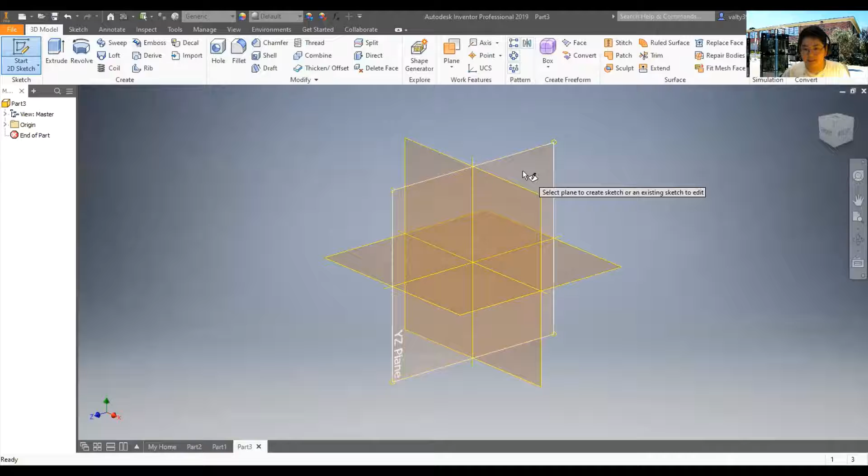Draw a simple rectangle with the construction line clicked on. Draw any rectangle. From here, we can calculate things a little bit more quickly by using the dimensional tool. Make it 0.5 and make it 4 inches tall.

With that done, let's move on to the Spline tool. Click onto Spline Control Vertex and click onto the top right of the box. Then click a little bit to the right and click all the way down. With that, your spline is done. However, the computer still thinks you're editing your spline. To finish your spline, press the check mark.

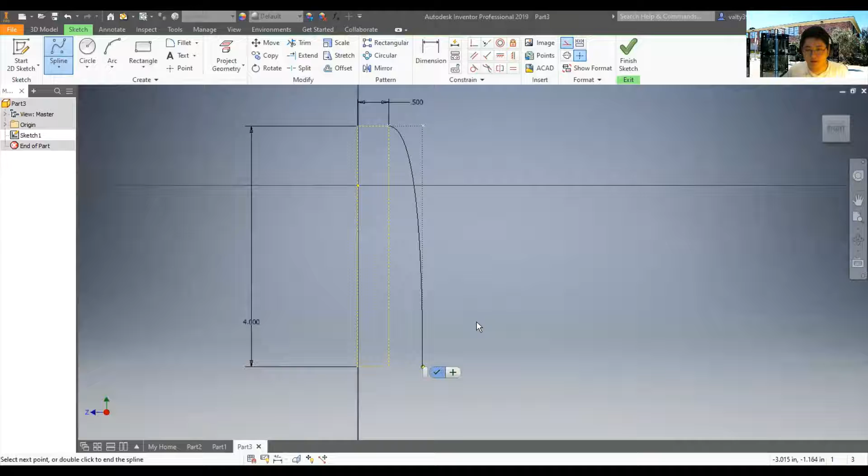There we go. Grab a normal line, and now let's turn off our construction line and just draw there to there. Right click and left click cancel to get out.

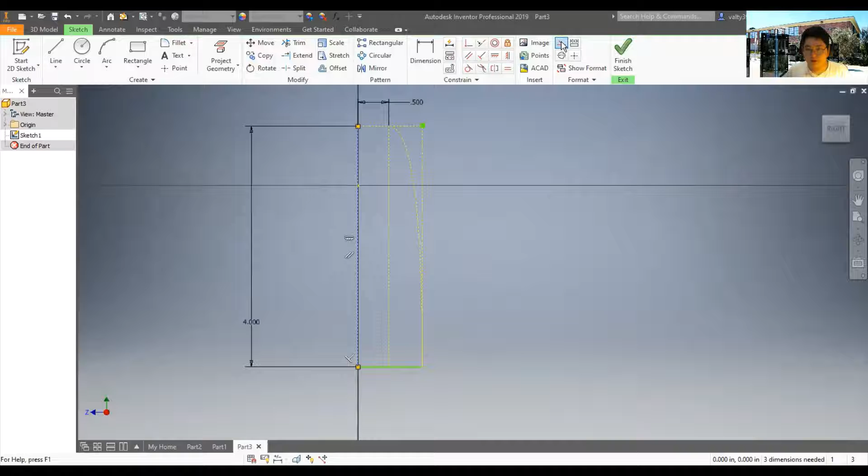Now, let's make all our parts into non-construction lines. Click onto this line and click on that. Click onto this line, click on the construction tool. Click on this line and click on the construction tool. And lastly, our spline, click on the construction tool, and we should be out of construction mode.

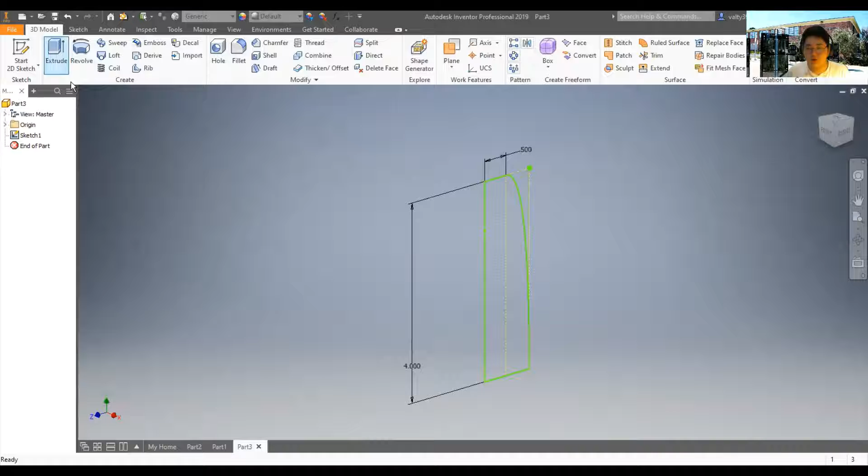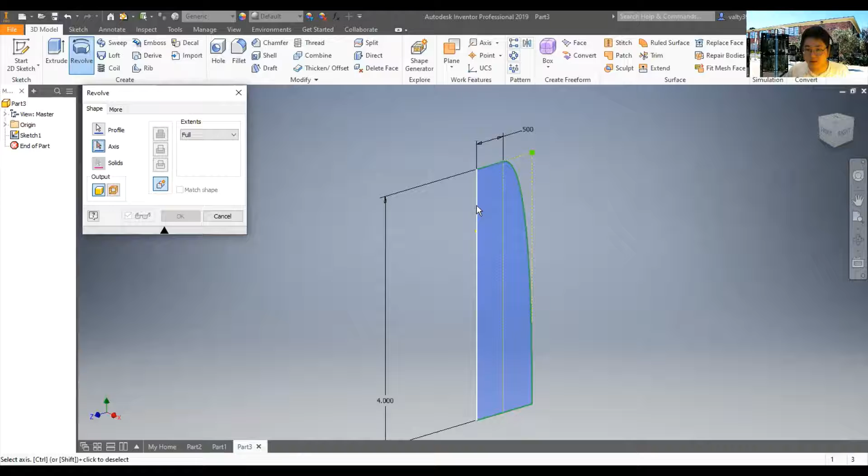With that said, let's now finish our sketch. Instead of using extrude to convert this 2D figure into a 3D figure, we will choose Revolve. There are two types of things you need to select. First, the profile - make sure to select all your surfaces with a profile. Then click on Axis, and make sure to choose this white line - it must be this line. Then click on Angle, and let's go with 180 degrees.

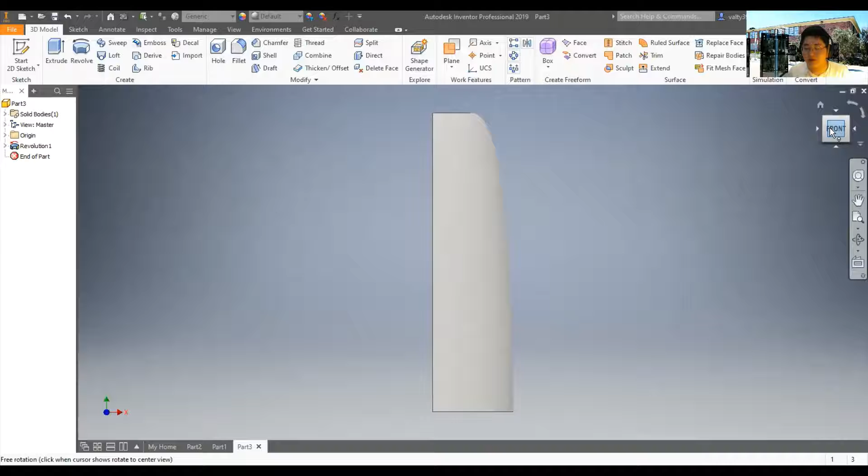Now, the curvature of your spline can depend on your own design. However, this will not contribute or disturb the fitting of the devices. So please feel free to change the shape of your spline to make it more curved, less curved, or curved however you want that is ergonomic. However, make sure to take those measurements I've said before, 0.5 inches here, seriously, since you cannot change that.

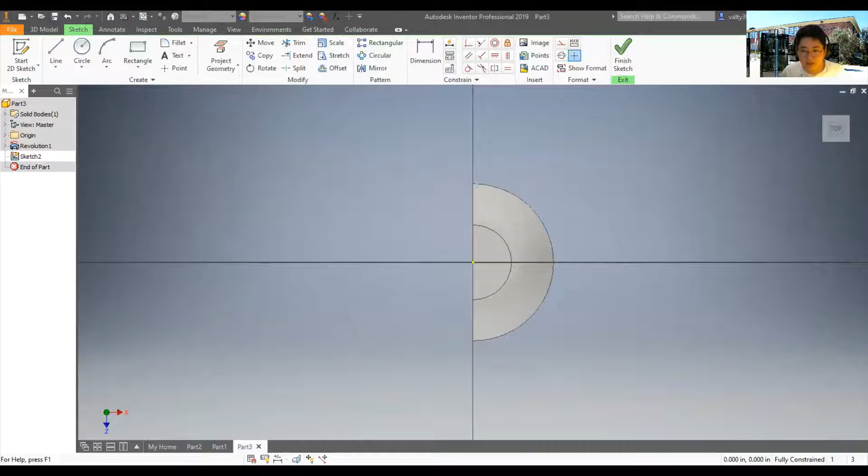Then let's redo our 2D sketch by clicking Start 2D Sketch and clicking onto the box over here. Here, we will need to drill in our hole so that our hand covers can specifically fit. Now again, I will give you very specific guidelines on the dimensions needed here. Click on Circle and draw in any random circle. This circle's diameter must be 0.3 inches.

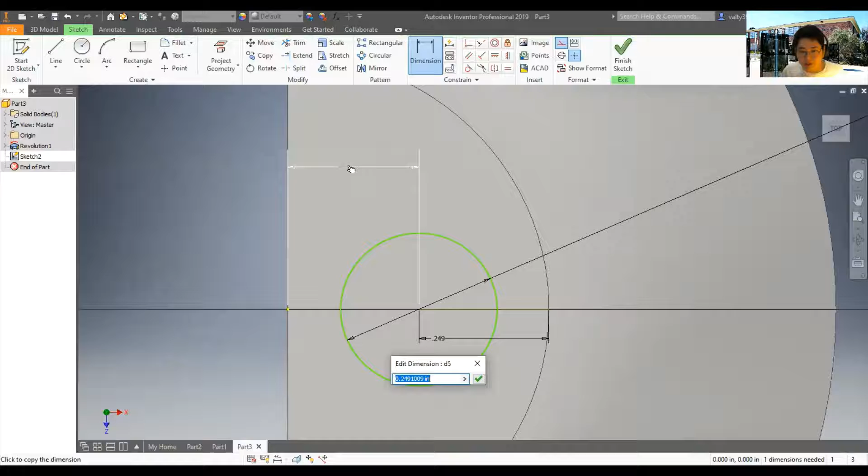Now, the distance from here to here should be any random distance. However, we want to make this hole at the center. So click on this point and this circle over here. Instead of doing that, let's create a new line. Click onto the construction tool and click on line, and click on from here to there. Now it will let us choose. Click on the dimension tool from this point, from that point, but instead of typing in a specific number, just click on that and we should be done. There, now it's on the center.

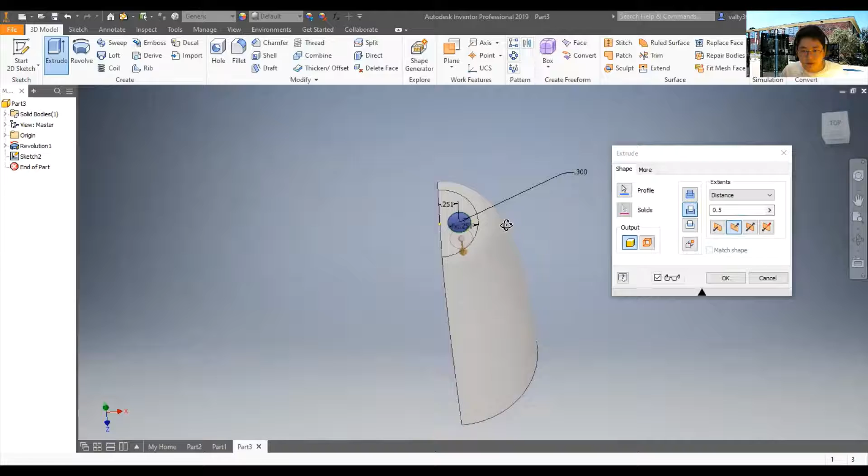Choose Finish Sketch and let's extrude it. Instead of extruding it upwards, let's extrude it downwards 0.5 inches. You can see by rotating the figure that you have drilled in the hole correctly. Press OK. Now that we have drilled the top hole for our cover design, let's drill our bottom hole for F2.

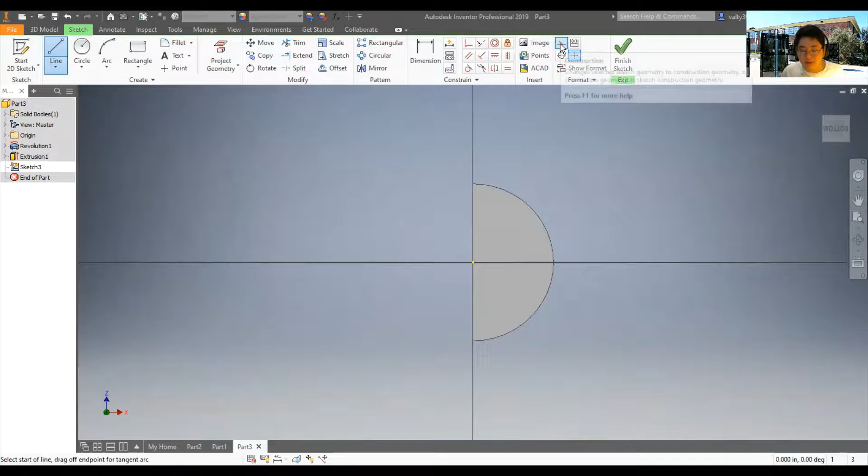This bottom hole also needs to be drilled in very specifically at a specific position, so please try to follow. First of all, make sure to have construction line on by clicking onto that and click on line. Then just create any line that is perpendicular. When you go close to the perpendicular line, as you see, it will automatically snap on, so do not worry much about that.

Now that we have that done, click on circle and just draw a random circle. From there, the diameter of the circle must be 0.3. It's overlapping now, but you do not have to worry about that. Now, let's get the dimension from the center of the circle into over here and make it equal to 0.8 inches.

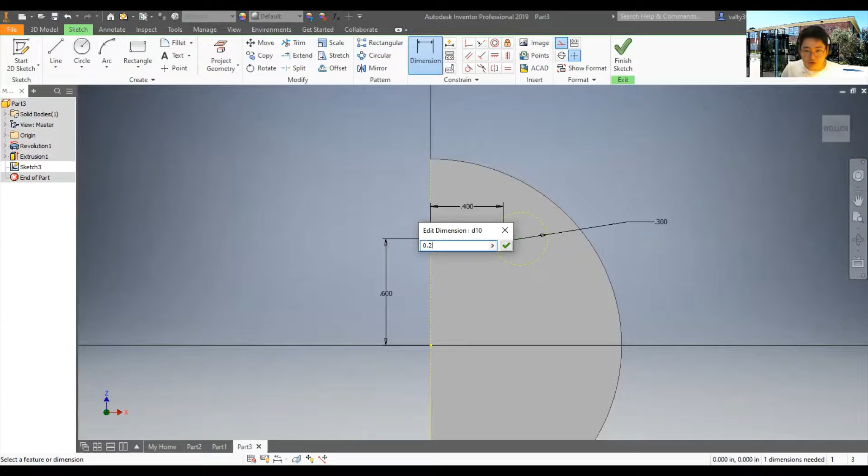Then, since it's still not fitting, let's change this to around 0.5. But since it's a little bit too close, let's change it to 0.6. And then we must change the distance of this to 0.4. Let's try 0.2. You see that this line is not perfectly aligned with this circle.

What you can do is click on this tool, click onto the point, and click onto the circle like that, and there, everything should have worked out. Then here, we can choose a specific distance, like 0.3. For this specific design, let's go with 0.6 and 0.3 to make it more uniform. Click Finish Sketch.

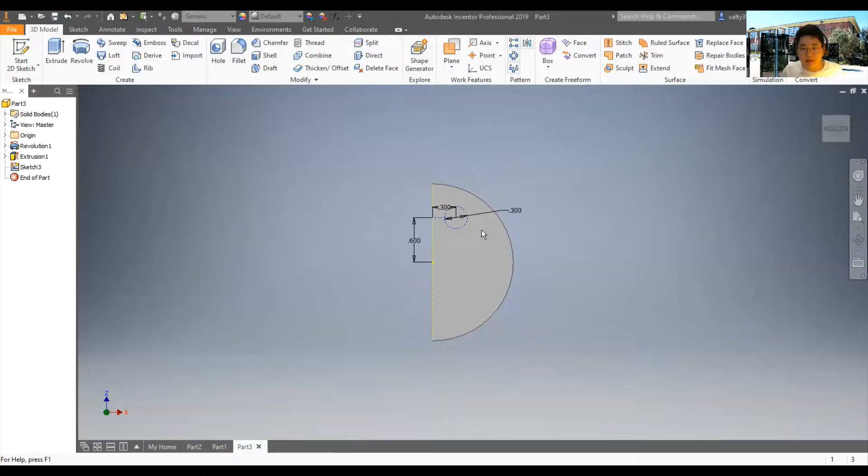However, we must make sure that our design is in non-construction lines. So go back, click onto the circle, and click on this construction tool to make it into a non-construction line. Now that the computer recognizes there's a circle, click Finish Sketch and Extrude.

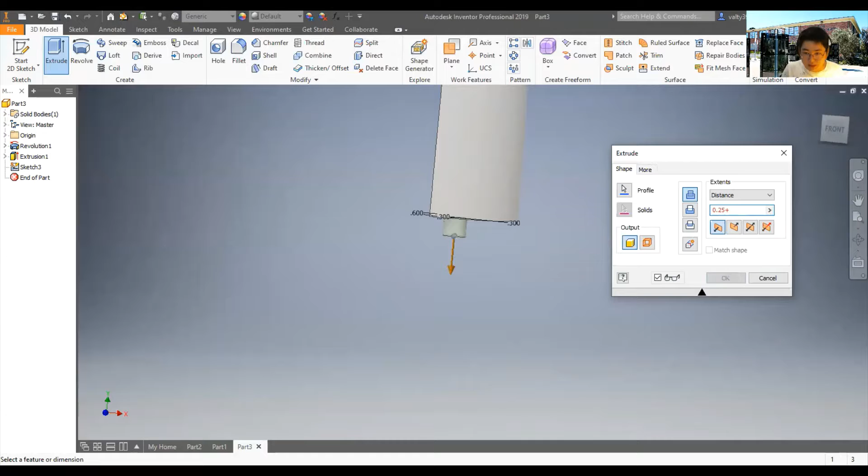Now, we don't want this extruding only 0.5 inches - you must also account for the thin sheet of F2. So you must press 0.5, or rather 0.25 plus 0.5. That should cover 0.25, which is F2, the base plate, and 0.5, which is the hole that's drilled into F3. With that said, press OK.

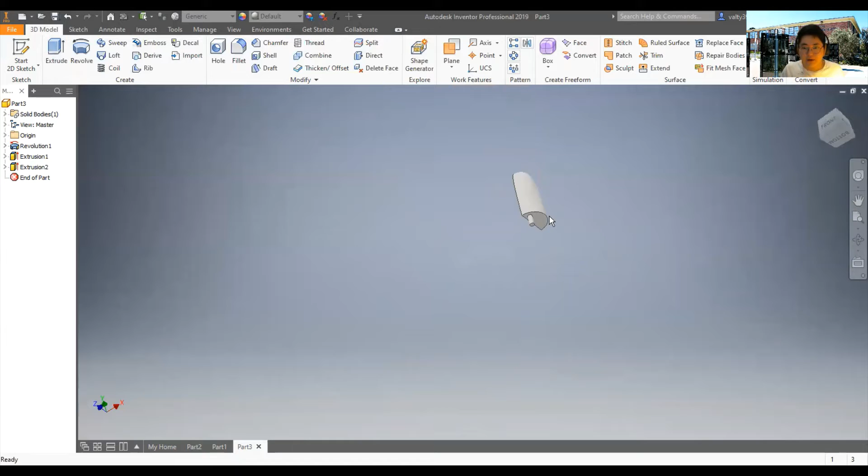And there, you're done. As I said, the shape of this curve can depend on your design, so please feel free to take your time and put some creativity into your designs. Good luck modeling.